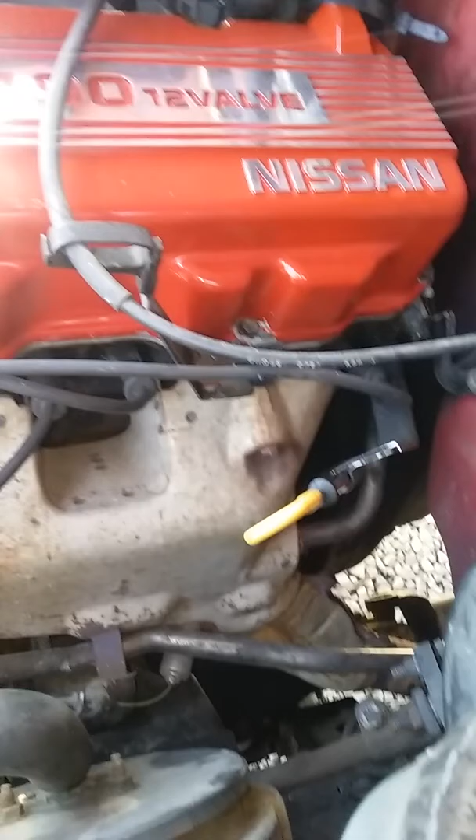Okay, you know how I was gonna make an update video on what I done to my truck? Well, here it is. And if you're wondering why the hood's popped open, it's because I fouled my spark plugs.

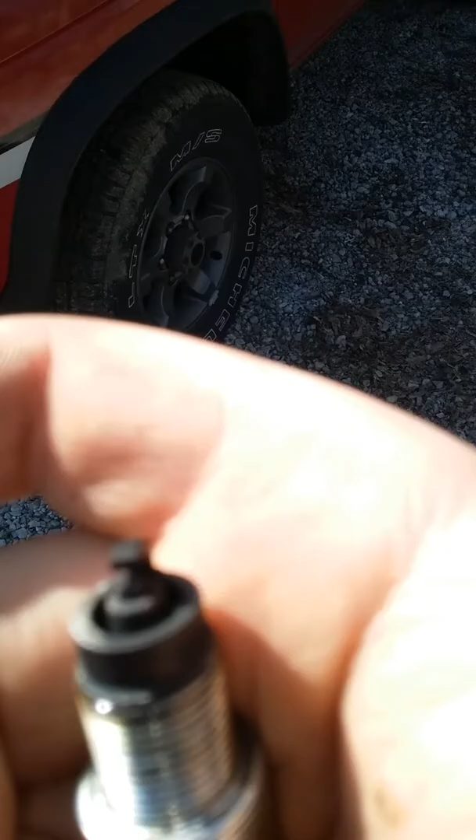Hold on. For the focus.

You can get a pretty good idea how bad they're fouled. I used some seafoam yesterday. That should be the seafoam can. Yeah, it is. I used that, put it in my truck yesterday, and put a whole can in my gas tank.

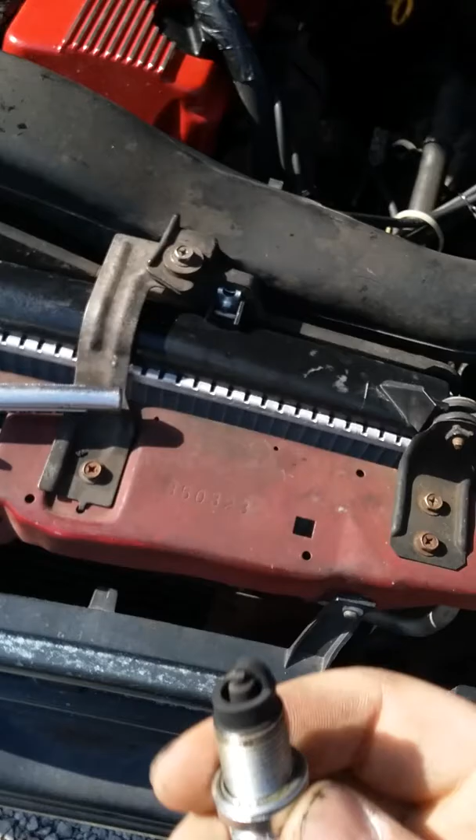Well, I decided with brand new spark plugs to be an idiot and put seafoam in the intake. I'd take this off, and I just took this off so it would stay out of my way. I did it all yesterday. I even bought a professional $7 spray bottle and used that, sprayed it into the intake right there.

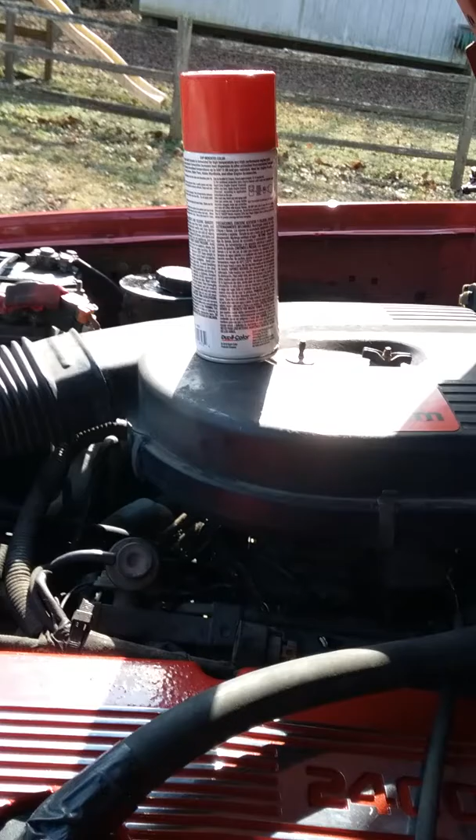I'm shaking. Oh, and if you're wondering why that's how it is, it's because there's a chip in my valve cover I'm about to touch up with Dupli-Color paint. And it cleaned my intake manifold.

I can tell you why. Because it looks exactly like my washer. It used to look like my wing nut. Well, now it looks like my washer.

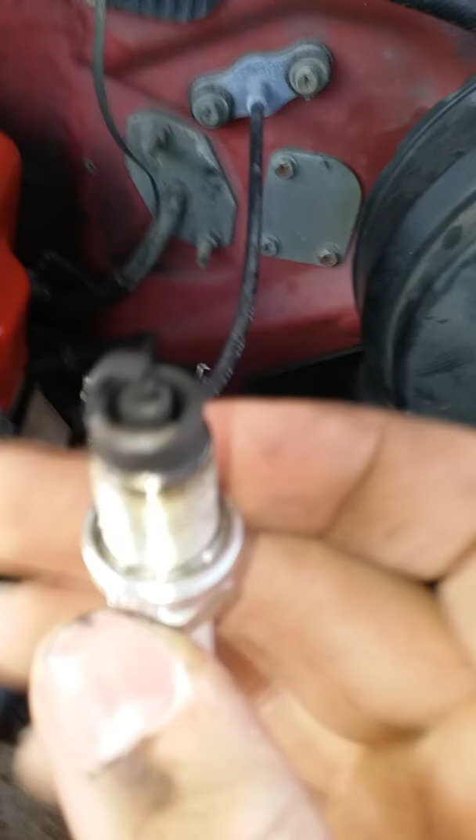But it's destroyed my spark plugs. And these are $20 NGK spark plugs. These are the ones that melt off the carbon when it gets up to operating temperature. Can you see that? NGK, oh yeah. These are the ones I bought for my truck that melt off the carbon when it gets to a certain temperature.

See, that's what it's supposed to look like right there. Because obviously the carbon didn't hit that.

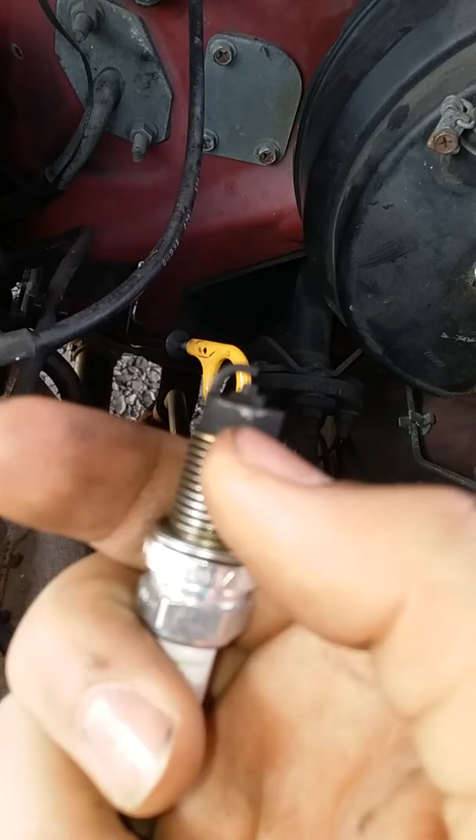Anyways, everything was going to plan yesterday, even after I drove it around for 30 minutes. They say to drive it around for about 30 minutes pretty hard trying to clean all the carbon out, let it come and go out the exhaust and all that stuff. Well, I did that. But maybe I didn't let it run long enough or something.

I don't know, dude, but I am never putting seafoam back in my truck. This motor has got 202,000 on it, something like that right now. It's sitting at something, I don't know.

Oh, of course I locked it. Jeez, it ain't like nobody's gonna steal it while I'm standing out here right next to it.

But it's sitting at 202,685, you can probably see that. And I decided to put seafoam in it 2 days ago now, yesterday. Well, that was a bad idea because it has officially destroyed my spark plugs.

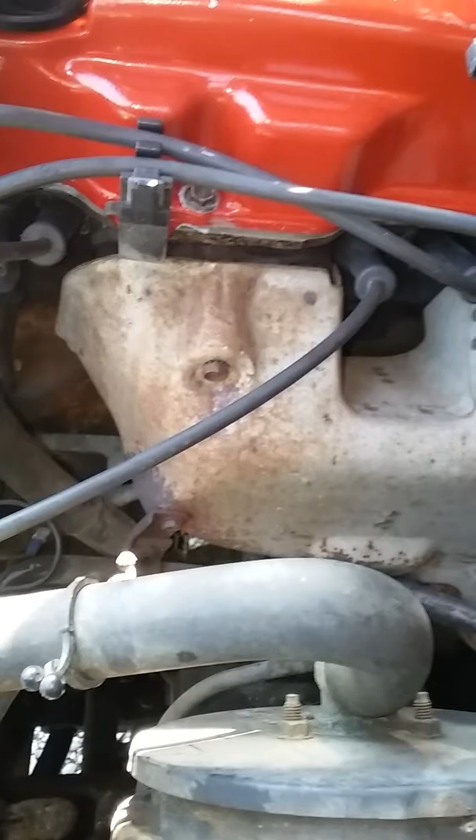All 4 of them look just like that, no matter what, because I just pulled them all out. And I don't know, maybe if it had loose carbon, I pulled all 4 spark plug wires off and didn't even mark them, but I know they're the right ones because I pulled them down and away, took all 4 spark plugs out, and turned the motor over about 3 revolutions, and did it 3 more times after that. All in all, hoping that it may blow carbon out.

I don't know, so when I put the new spark plugs in, it won't foul these brand new ones either. Because that's what it's supposed to look like, dude. These spark plugs ain't even 2 weeks old. I swear to God, dude.

Valve cover is finished, everything's finished. It was finished, and I've been driving this truck for a little while now, probably about a week and a half. These brand new spark plugs did not look like this. They looked like the threads at the very bottom, they looked like that, and that right there.

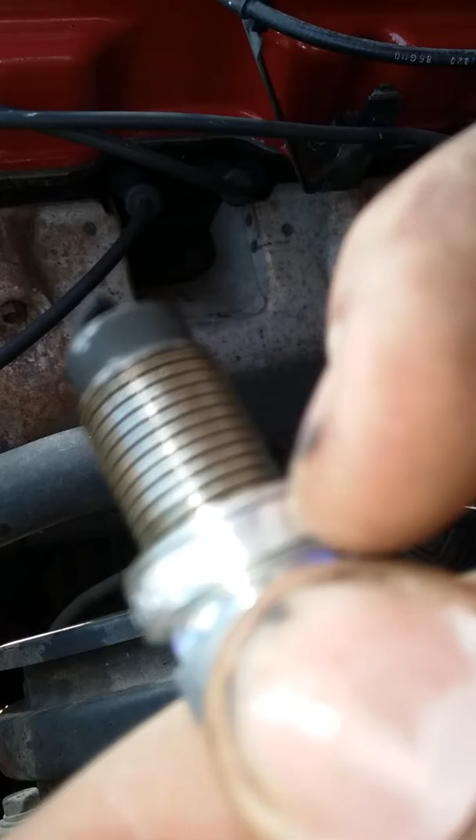And all of a sudden, this morning when I cranked it up, it was running on 2 cylinders. I pulled the first spark plug wire, pulled the second spark plug wire, even pulled the third one. The third one finally made it run on the 4th cylinder, which was the last cylinder because it's a 4-cylinder. But this spark plug or piston was not firing, the second one or the third one.

It was just crazy. And when I plugged them all back in, it didn't even do nothing, it still kept misfiring. But every time I plugged the wires back in and went back in the cab and gave it gas, it would run on all 4 cylinders. So when I decided to pull the spark plugs, that's what I get.

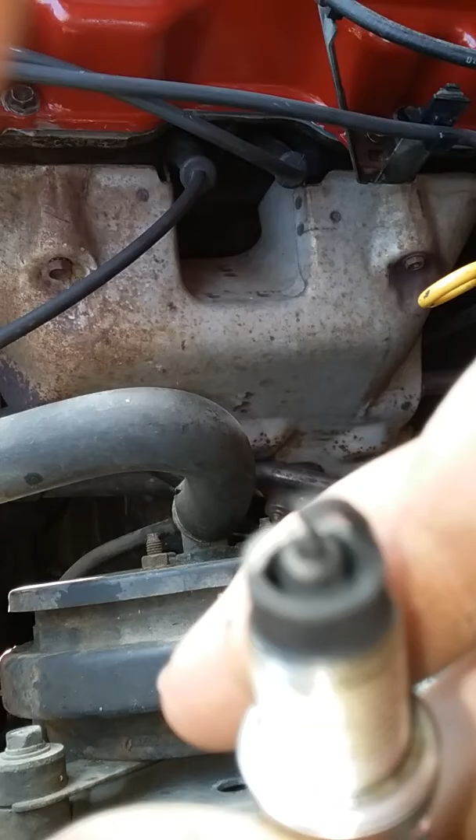It's just a nasty electrode, nasty, flat, burnt out spark plugs, man. And this all happened this morning.

This is pretty much gonna go live on YouTube right after this. But this is sad, dude.

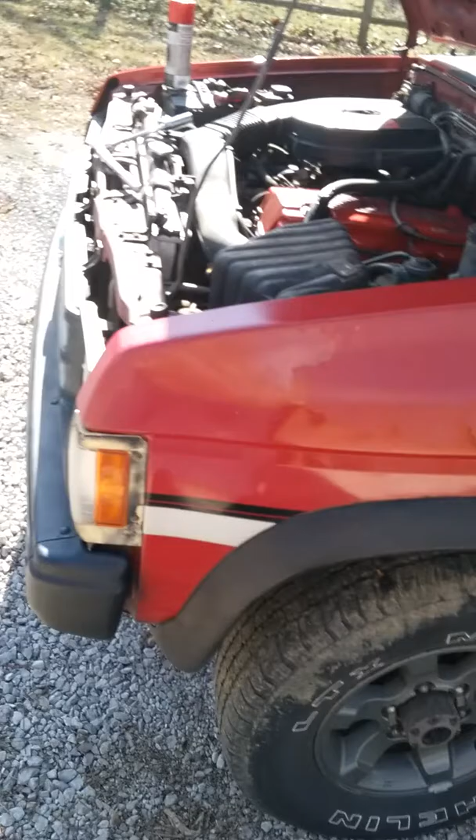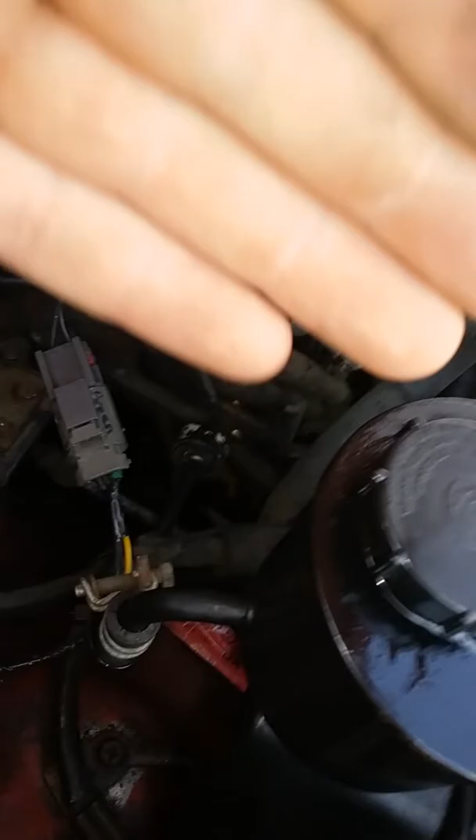I probably will never ever put seafoam in my other hard bodies when I plan on buying a couple more after this one. I will never do that. I mean, you can just tell by the exhaust note it wasn't running right. And I even unplugged the...

What is that? Good lord, I just replaced that too. That was like a $56 part. That's a hot and cold air temp sensor. This part's brand new, this is the old part. We had to reuse this. Somebody yanked the wires out of it running up through the bottom of the air cleaner here. So we replaced that, brand new fuel filter.

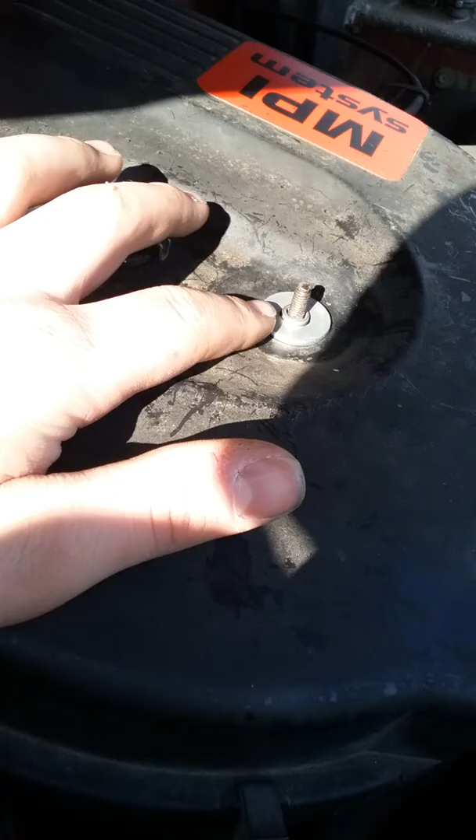The fuel that came out of that was nasty, very nasty. But the intake itself, the little valve inside looks like that. And the whole intake looks just like that. But the spark plugs look just like that. It's pretty sad, dude. I can't believe it.

And I'm pretty pissed because that's $25 spark plugs, or $20 right there. That's another $20 I gotta spend on fucking spark plugs just to get my truck back. And I did plan on getting new tires, but they may have to wait because I can't afford them now. If I'm going to go through spark plugs every month, it's because of doing this seafoam bullshit.

But if you ever want to take spark plugs out, changing the subject real quick, get you a spark plug socket. It's got the rubber inside where it puts the end of the spark plug. I forget what it's called, I'm just gonna call it plaster for now. It puts the plaster in there so it doesn't... a regular socket would snap the plaster off the end of the spark plug, which is this white stuff.

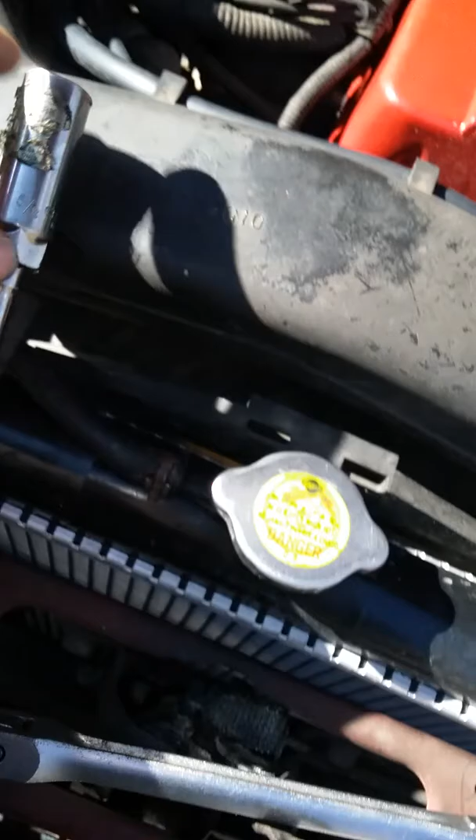This could also be used to break glass too. But if it breaks that stuff off with a regular socket, that's bad. But that's why they made spark plug sockets, in case you people don't know. But I'm sure you do.

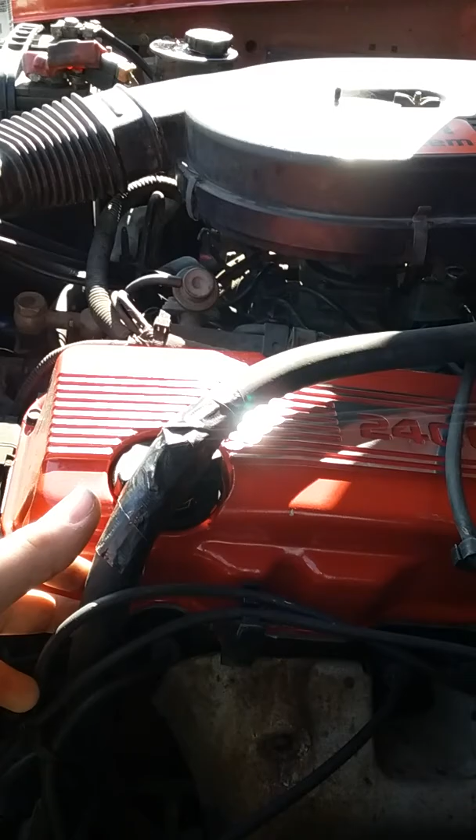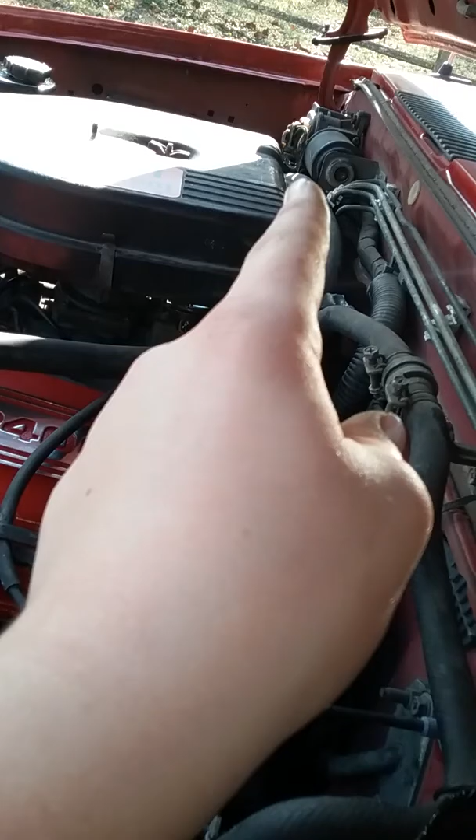But it's really sad. But my valve cover stopped leaking, it hasn't leaked since. So, but I need somebody to tell me where this freaking AC line goes. I know damn sure well it doesn't go right here because every other hard body I see, it's like way back in here somewhere. I don't know why it's right here. I mean, it's right behind the air cleaner, the valve is. It's like right there. And actually a piece of my valve cover, air filter cover, my goodness, people, sorry.

I'm so pissed off. I actually broke a piece off of that yesterday because this AC line kept getting in the way. I mean, it's scratching it right there and it's scratching it right there. As you can see, there's plastic tape or electrical tape right there because it keeps it from rubbing on that corner right there. That tells me it doesn't belong there, and same with right here. I guess it gets so hot, because it's the oil cap, but I don't know, man.

I turned the motor over, and I don't even feel like starting it.

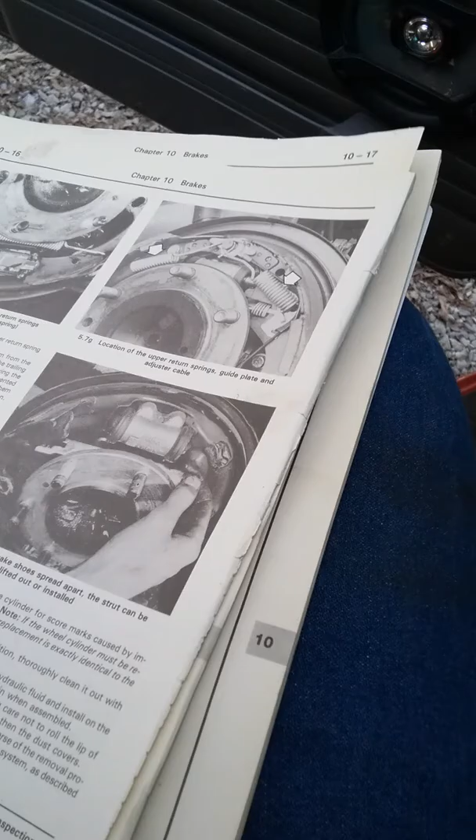Got a vacuum off the dash. But here's my automotive repair manual for these trucks. Let me take this off so you don't see that. There we go — it's a Haynes manual. It ain't worth a shit, but I like the truck on the front of it.

But come back here — oh man, it's like fucking 20 years old, the manual itself. I need an upgraded one because pages are falling out of it. It's been used a lot, obviously.

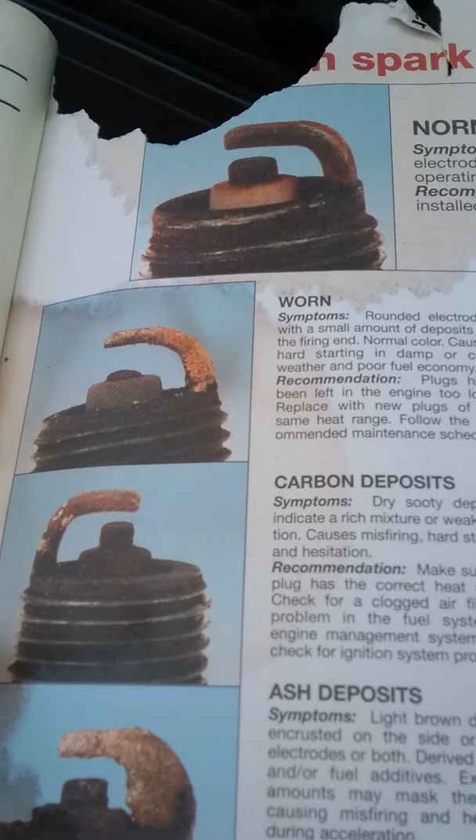Mainly on the brakes it's been used a lot, because somebody must have had some brake trouble with this truck. Because these pages wouldn't be ripped out like they are — they're pretty badly ripped out.

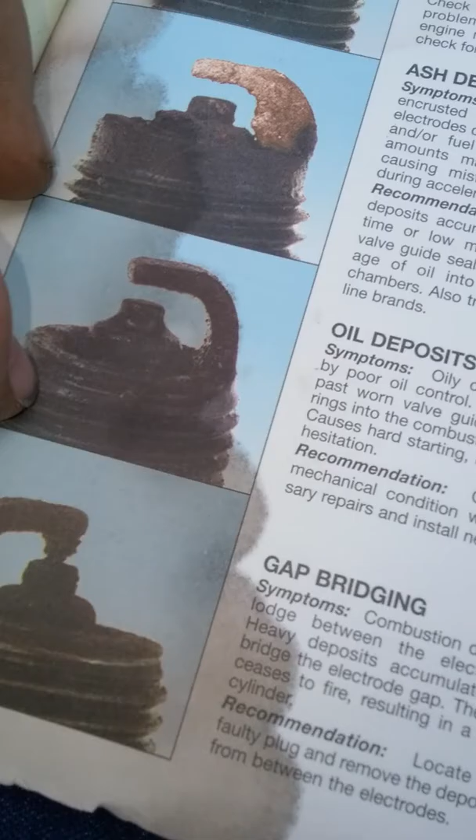Okay, now it even says on here the damn spark plug — let me show you, see? Right there, it tells you what kind of spark plug they look like if they're fouled.

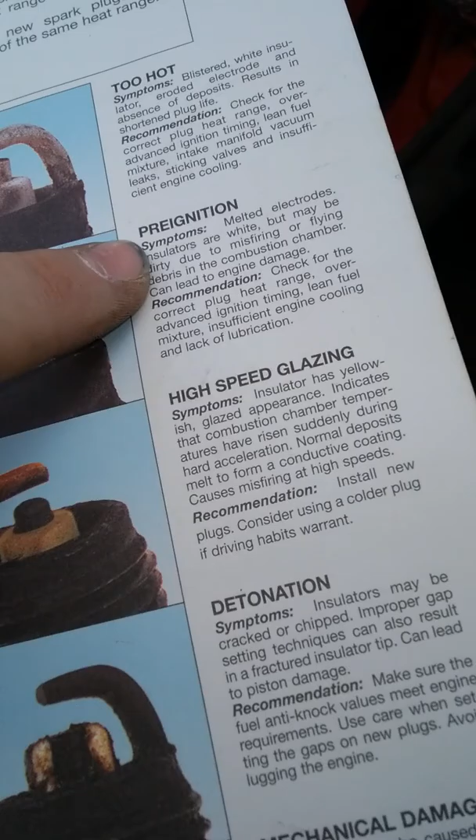Right here it is — you got too hot, you got worn, you got normal, you got ash deposit, carbon deposit — that's mine, it's carbon deposits, it's bad.

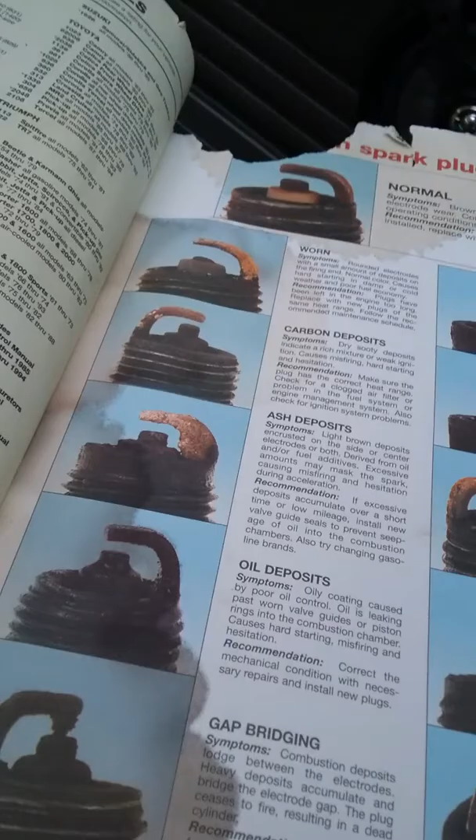Oil deposits, gap bridging, which means that — combustion deposits lodged between the electrodes, heavy deposit accumulation, and bridged.

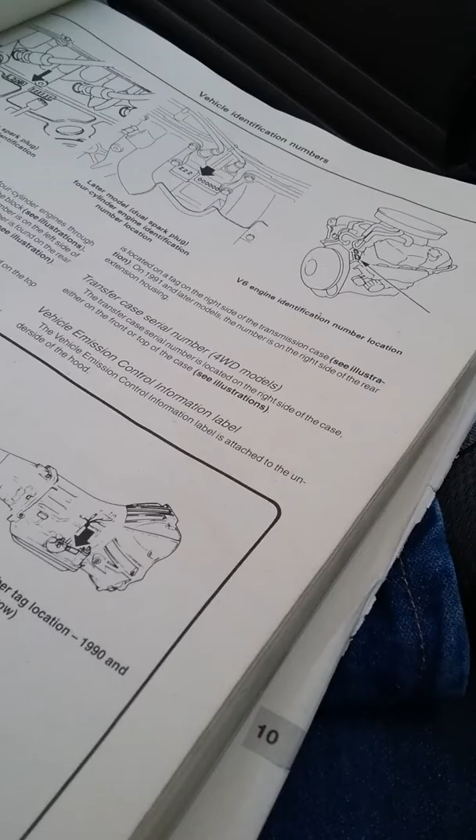Too hot, whatever that means. Pre-ignition, melted electrode, high-speed glazing, detonation — which means your motor pretty much blew up. Same with that one. But even this manual, of course, will tell you everything about it.

I mean, it tells you about spark plug gap and everything, which is in tune-up and routine maintenance. They even put this '88 hard body king cab in it. So it just tells you how old it is, tells you where to find your VIN number and all that good stuff.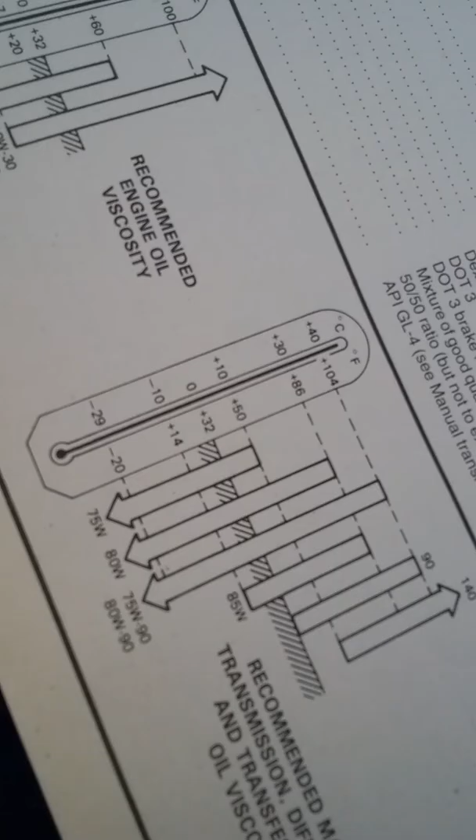I'd rather have an original owner's manual, but let's see if I can find the spark plug gap for you guys out there. Let's see.

No, that ain't it. Oh my goodness, falling off over here, boys. Oh man, this video's gone.

Here we go — well, there's your recommended engine oil. 10W30 and 40 right there, and 5W30 for below 20s, minus 20. Let's see — here you go.

Lubrication and fluid capacities — this is all the year models. V6 engines, 2-wheel-drive, 4-wheel-drive, 4-cylinder engines with 4-wheel drive, 1991 and later.

Well, I say that — 1991 and later, it's 4.5 quarts of oil.

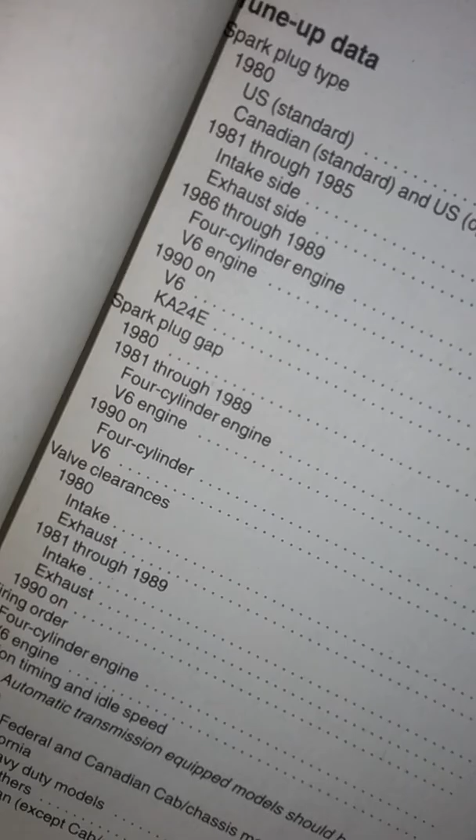Now, spark plug gap — I have no... here we go, well here we go. 4-cylinder engines... hold on, guys, I gotta get in the truck itself and look at this.

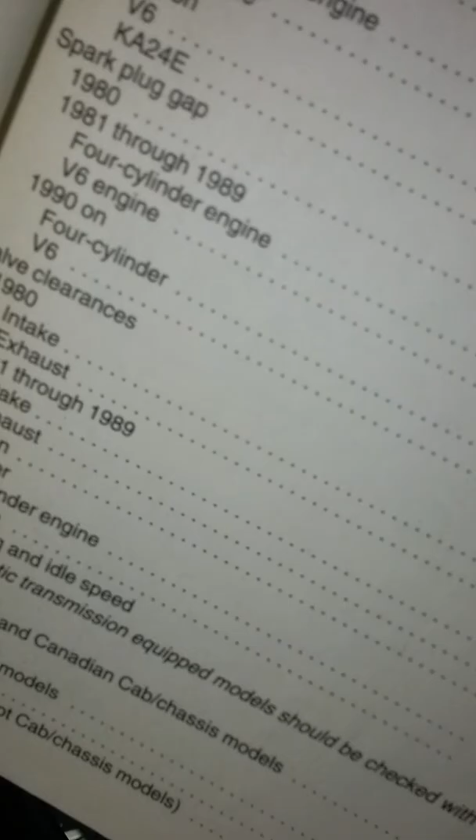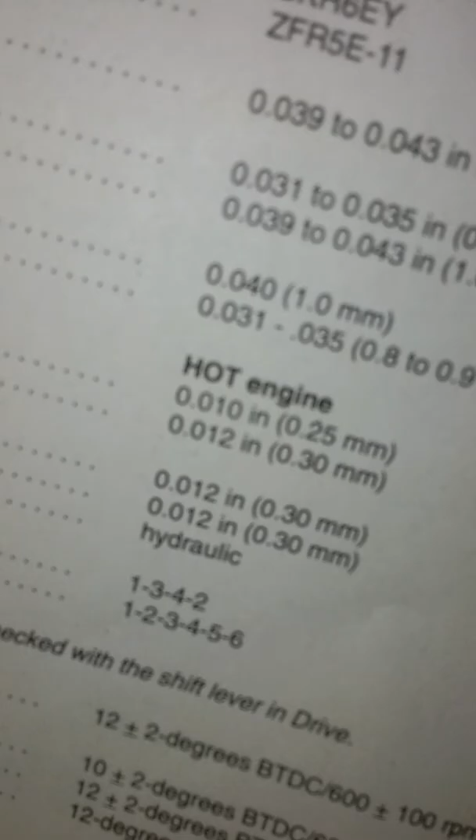It should tell you right in here. See, this KA24E — but that's the spark plug type. We need the spark plug gap.

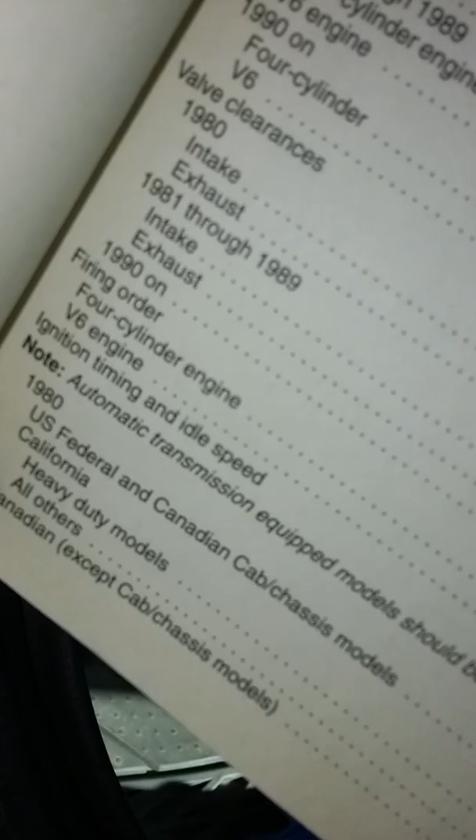4-cylinder engines is 0.040, I think. Yeah, see, 4-cylinder, 0.040, and it's like 1 millimeter. Yeah, 1 millimeter. And then your V6 engines, which is a 3.0...

31 to 35. And valve clearance, 1990 intake and exhaust is that — hot engine, cold — I'm sure they got cold engine too. Anyways, so it's 0.040 if you're looking for that.

But anyways, guys, I'm gonna end the video here. I just want to let you guys know I'm not gonna start the truck because it sounds like a damn — sounds like a John Deere 6560 tractor, freaking loud freaking thing.

And no, I never leave it in gear or start it in gear because only idiots do that. That's why there's a fucking e-brake.

See, mine works. Yep, if you don't own a Hardbody, this is what you do.

You pull out somewhat, twist just like that, let it go all the way back in, and then twist it up like that. It never goes all the way up. But oh well, oh man.

Anyways, that's the end of this truck. Next job is putting spark plugs on, and well, that's a big project — cutting the rust out.

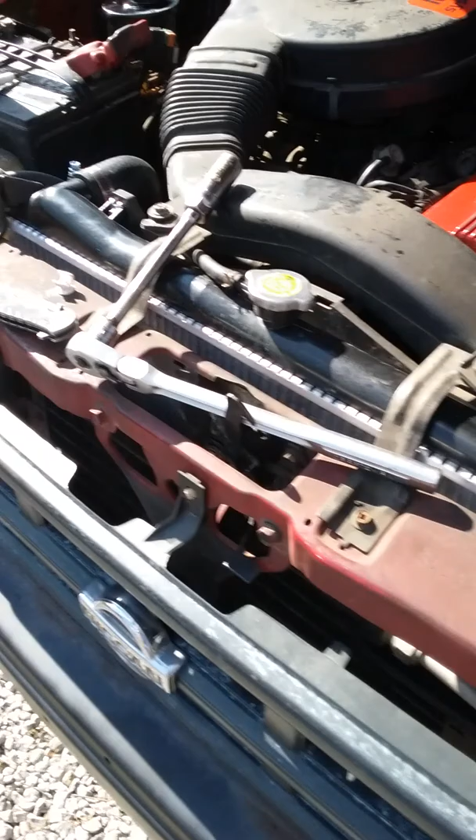But I'm gonna paint my windshield wipers — these little guys right here are losing paint. Put new windshield wipers on, put new spark plugs, and be done. Oh yeah, I'm gonna take that Dupli-Color paint and touch up that little spot right there and be done for today.